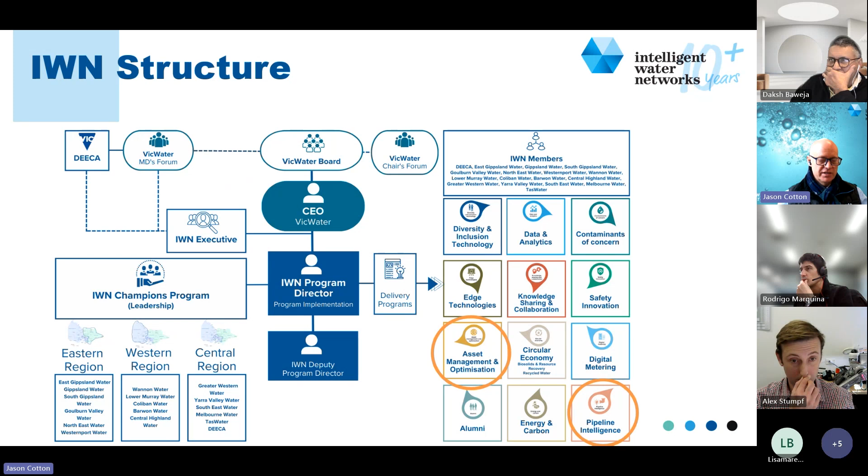Anyway, that's enough about IWN. Let's get into the meat. Why are we here? What is the problem that we're trying to solve?

One thing I'm really interested in is how we can enhance robotics, how we can build artificial intelligence and machine learning into the use of robotics in our sewers, so that we can not only assess the condition of the sewer, but predict the condition it's going to be in, and hopefully overcome any challenges presented by that condition.

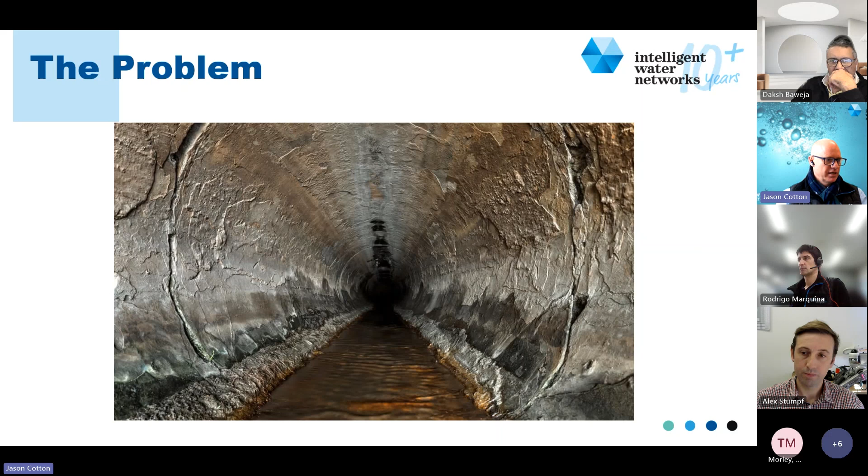So how can we prevent the sewer from corroding? Why does it corrode, why do we get this degradation? Well, you'll probably know the old rotten egg gas made in labs at school or university - that's hydrogen sulfide, and that smell is characteristic of the odor of a sewer. However, that compound is problematic not just from an odor perspective.

When hydrogen sulfide goes into the headspace of the sewer, there are bacteria that live in the pores of the concrete up in the crown of the sewer. Because the water line is only part way up the sewer, you do get oxygen, and so that hydrogen sulfide gets absorbed into the concrete.

These oxidizing bacteria then have a field day with the hydrogen sulfide, and it forms sulfuric acid. And it's that sulfuric acid that eats away at the sewer. So that is a wicked problem.

The other side to this wicked problem is that you put sensors in there and they don't last very long. So trying to measure this degradation, trying to measure the hydrogen sulfide content, is entirely problematic. And so that's why we're here - we're here to solve that problem.

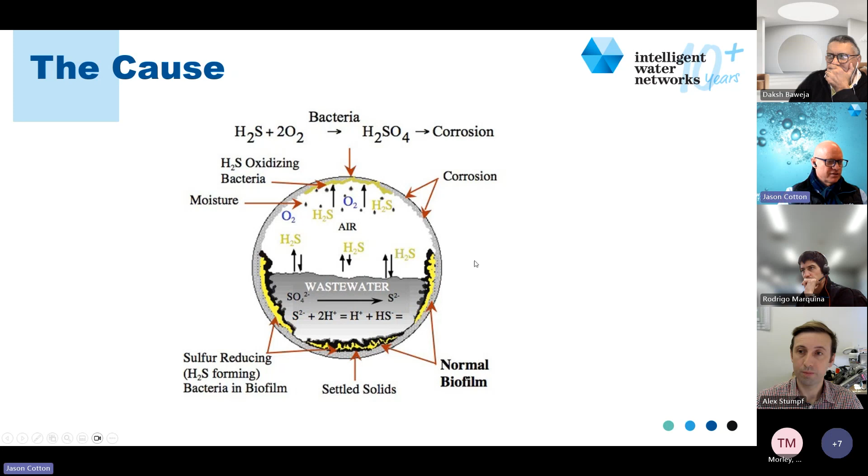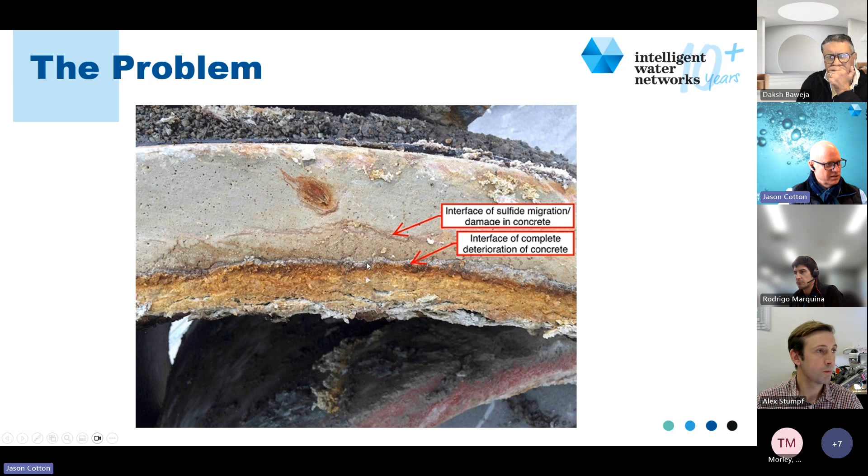You can see here that as you get this porous degradation and that falls away, you then get the second layer where it starts to degrade because sulfide migration is occurring in that concrete. And that is not a good thing, because it leads to sewer collapse.

Now you can imagine the network of sewer that's underground, and if you start getting collapses of sewers under roads, under runways in airports, under houses, that's a massive issue. And so we want to solve for this problem.

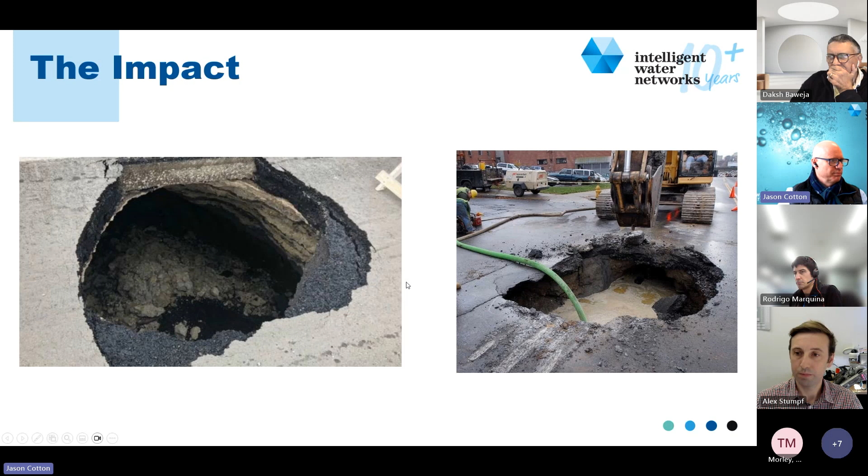The other side to this problem, and this is where we're focusing with Smartcrete, is that along the network, these maintenance holes are a natural area where there's a lot of headspace and air, and the hydrogen sulfide gas goes into that headspace. And so we get significant degradation of these maintenance holes.

And of course, this is where trucks drive over, people walk over, etc. So you get a truck driving over that, as you can see there, and that's going to collapse pretty quickly.

So the trials we're doing with Smartcrete, which Alex will talk into a little bit later, is that we're looking at a whole variety of different robotics for how to do measurements in that particular space that are non-destructive. And we can get a condition assessment and indication of that sewer.

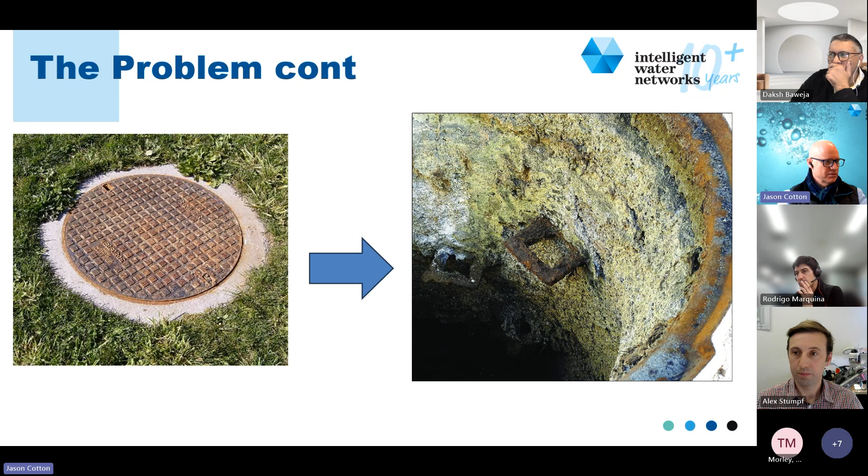And so, as I said, the challenge is in that headspace to develop devices that won't also corrode. And that's a wicked problem.

So lots of concrete sewer pipe in Australia and New Zealand. I'm not sure exactly where I got this figure from, but it's about 300,000 kilometres of concrete sewer pipe. So it's a significant asset that Australia has.

It's been listed as one of the federal government priority areas too, in terms of infrastructure and trying to maintain and prolong the life of this significant amount of infrastructure that's around Australia.

As Jason spoke about before, there's a common failure mode, which is the H2S attack. It can be quite prevalent in certain parts of the sewer network, and it varies along different areas. Some areas might have lots of H2S issues, and some areas are untouched, and they can remain in the ground for many tens of years, maybe hundreds of years in some of the really old sewer pipes that we have, in particular in Melbourne.

So a bit of background to both projects: how do we go about improving the remedial works, how do we prolong the life of these assets?

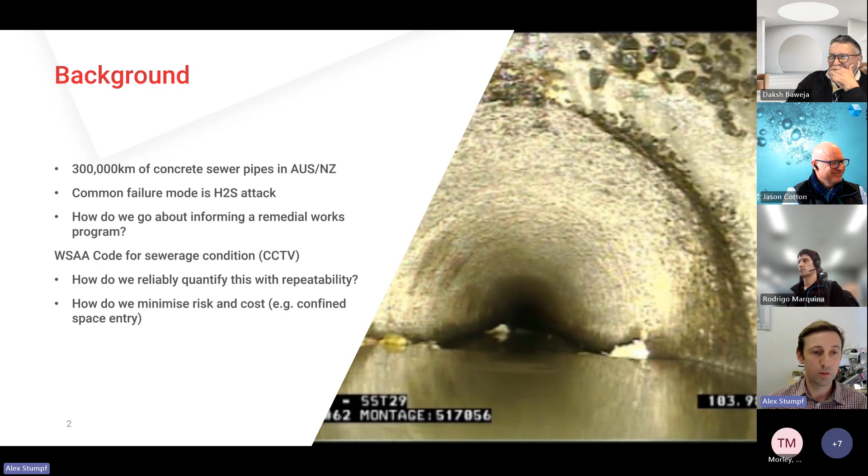We want to use robots and sensors to do this work for us. So it gives you a bit of background. Just to give a little bit of an overview, this might be somewhat obvious for some in the session today, but it's good to clarify what we're talking about here.

So the sewer access points are obviously the hole that goes down from the surface level down to the sewer pipes, and they have a shape to them that makes it challenging for a robot to do a condition assessment in. So there are certain physical constraints as to how we may position a robot in this pipe to do our sensing.

And then you've got your sewer pipes, which are the pipes that go in between the sewer access points. So to get there, we have to traverse the sewer access point. We pop the robot down, and then it will go along the sewer pipe and do its condition assessment. In this case, I've got an image of a CCTV robot. They call this robot the Beast. I don't know why, maybe it's a bigger robot, but it's got this nickname, which is good because it actually pushed our prototype robot down the pipe when we were doing some field trials about a year or two ago.

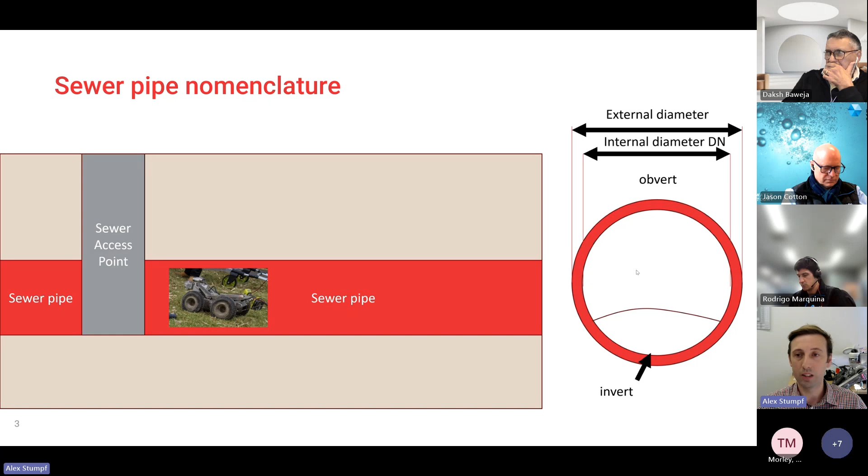Now in terms of degradation for a sewer pipe, it varies. Some people think there's more degradation at the obvert, some people think there's more degradation at the effluent line. But from what we've found, and we haven't done a lot of testing, we're under the impression that it varies, which makes sense, because it's very dependent on the local environmental conditions as to how much degradation you're going to find on a particular section of pipe.

So I'll move on to give a little bit more of an overview of concrete pipes, and I'm sorry if this is common knowledge, but it might not be for some. I've lifted this out of the Holcim concrete pipe reference. Obviously these pipes are made to a particular modern standard, Australian standard in terms of concrete compressive strength, all that sort of thing. When we're talking about pipes, they're classified into different classes and different DN sizes.

So for our projects, we have focused on smaller diameter pipes, but for the ones with Smartcrete, we're looking at diameters typically 600 and above. So for a sewer access point, the opening size is usually 600 mil, and then it will fan out to a much larger diameter.

So that's kind of the sizes of pipes that we're interested in. Different classes have different internal diameters that they may start off with. So one of the things that we will do with this project is determine which class of pipe is in the ground using our sensing means.

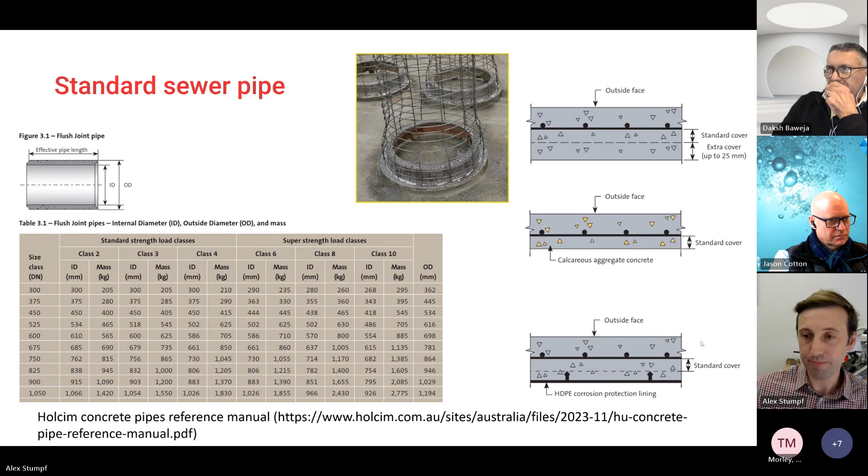How am I going for time? I probably should kick on here because I reckon I'm going to run over. Keep going, Alex, keep going. Okay, just you keep me in check so I don't run over time. So sewer access point, this is kind of five minutes. Excellent, all right, I can do that.

So this is what a sewer access point typically looks like. You'll have the access hole, which is normally 600 mil diameter, and that section of pipe will only be a short section typically. The reason is that if someone's going to enter into the hole, they don't want to be confined within a 600 mil opening. So they try to make this as small as possible, and then the pipe will extend outwards to typically a metre, around a metre, maybe 1200 on some of the larger sections. So it does vary.

Again, for those older pipes, it depends how they did it. If they cast it in situ, they've got the concrete truck and formwork and they made the pipe. For modern installations, it's pre-made, prefabbed, and they drop it in the hole, and you've got the pipe there ready to go.

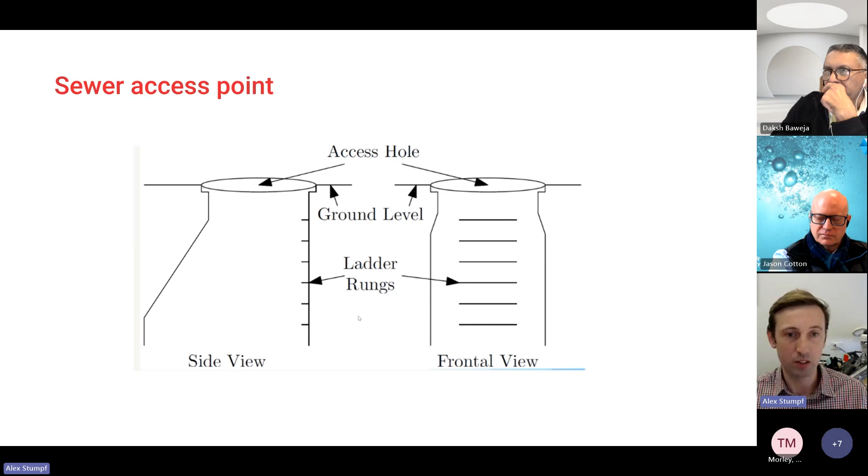So the reason I'm talking about this in particular is that it gives you an overview as to what the geometry is and what we're dealing with in terms of a sewer access point in particular. It's not a standard straight pipe, it's got some bits and pieces that we've got to deal with.

So at the moment, how do we measure the degradation? I'll go through this quickly. We use a penetration test effectively. What we mean by a penetration test is that we have a little probe that comes out and touches the wall and pushes through until it gets to a certain threshold. In the past we've set that to about 50 newtons, so it's not a very high threshold. With that we can see what is the depth of penetration, where does the start of the sound concrete begin, and we're not greatly impacting that degraded layer.

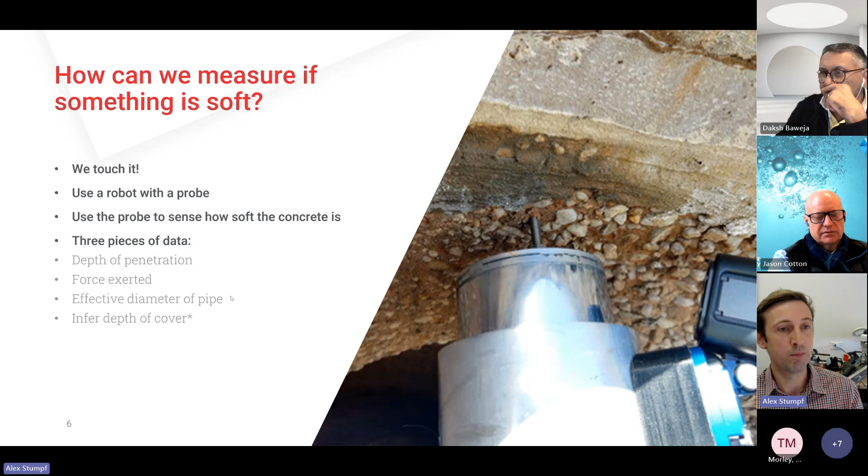Okay, why is my thing not going forward?

Oh, I want the other picture. Oh, I can show this. Yeah, so this is what a penetration test looks like.

For non-degraded concrete, we've got the penetration distance on the x-axis and the load on the y-axis, going up to a 50 Newton threshold. So for non-degraded, you expect the force to ramp up very quickly. For degraded concrete, we have a much longer profile that we find.

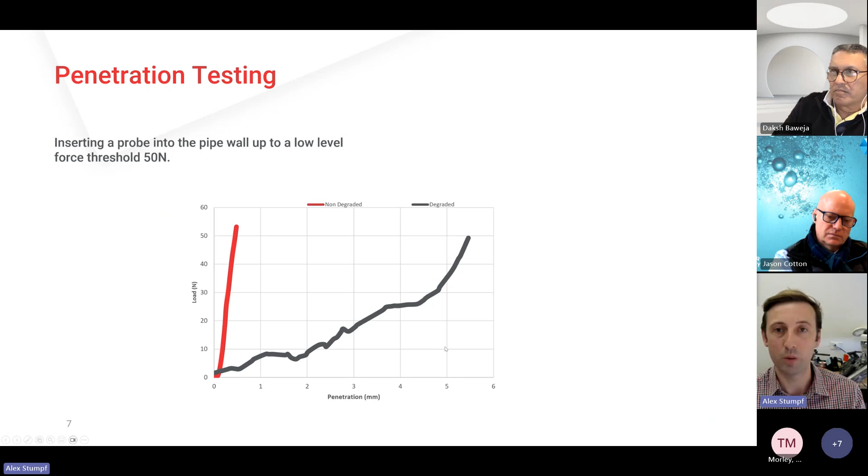So this was a project with IWN many years ago to look at the sewer access point. This was a proof of concept, just to have a look at this penetration test.

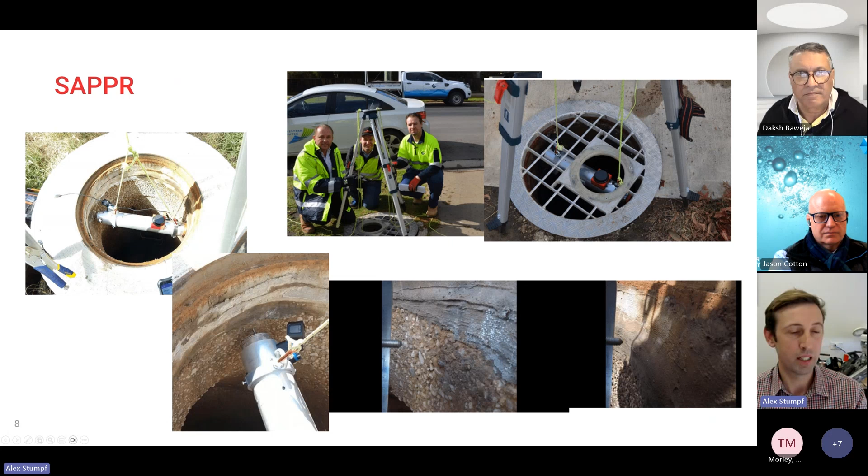It's a robot that does the sewer pipe. So we put this down the manhole, the sewer access point, and it goes along the sewer and does a similar thing, does a penetration test.

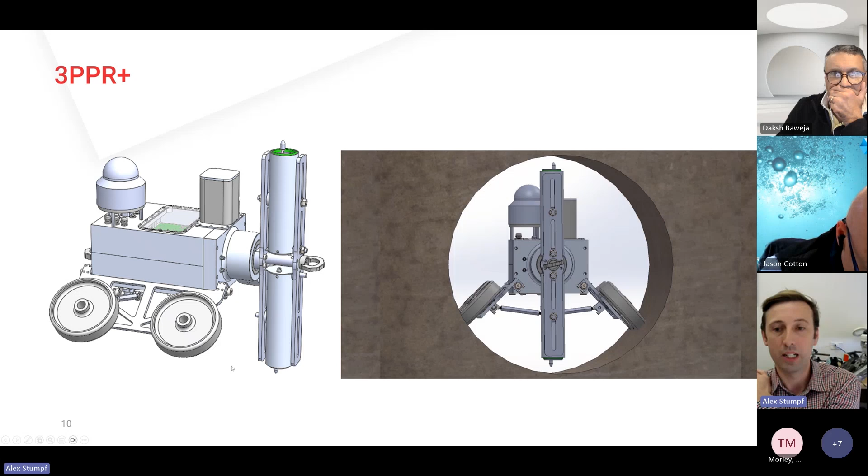Yeah, you can see it here getting lowered into the hole. You can see our issues with the ladder rung, and that we need to think about how we get that robot in there.

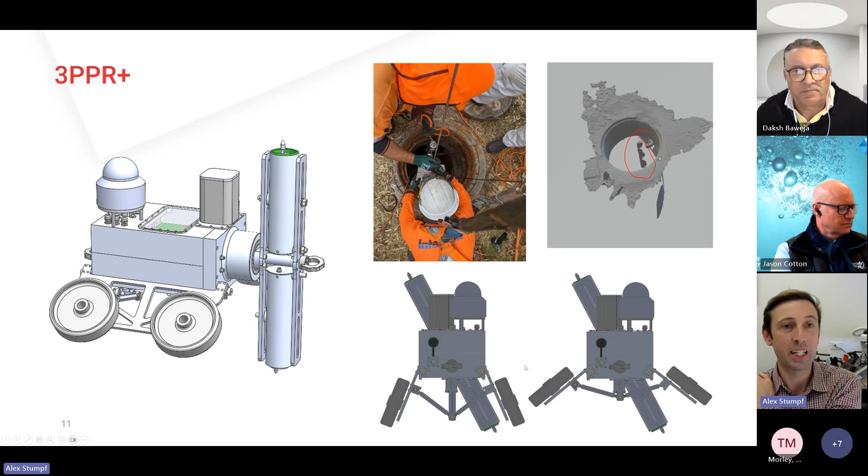I'll quickly go through this. This is it in the hole doing some penetration tests. I won't show the video because I'm assuming...

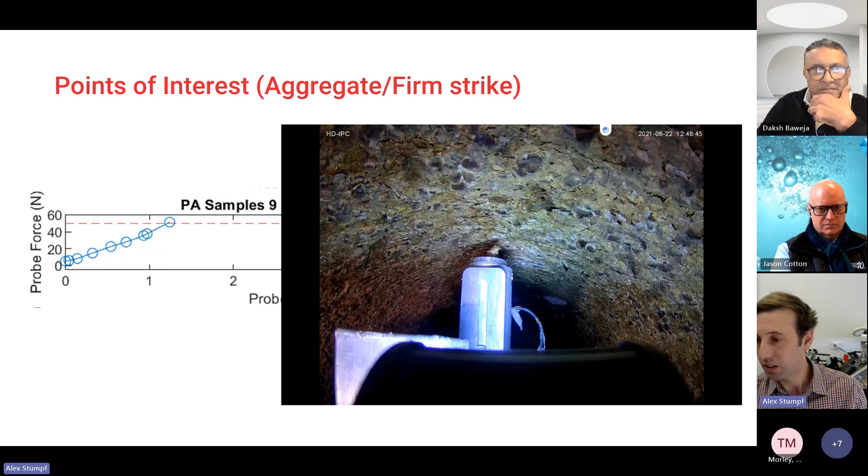Yeah, I'll just keep going through. There we go, that one's got a bit of stuff on the end.

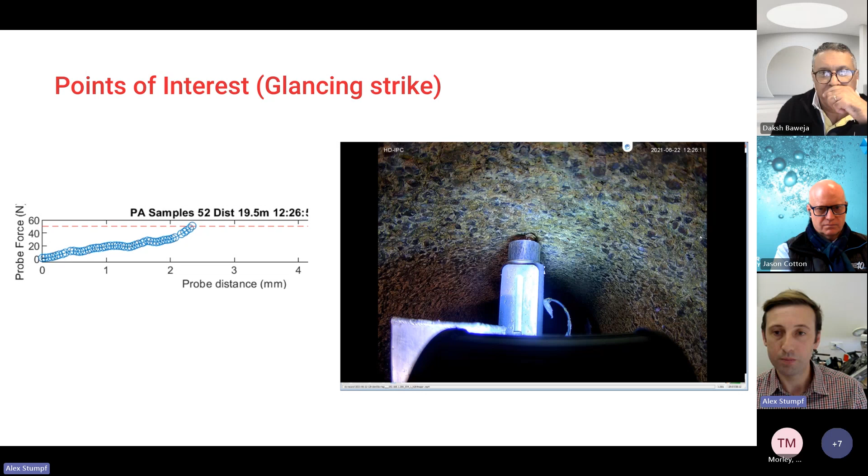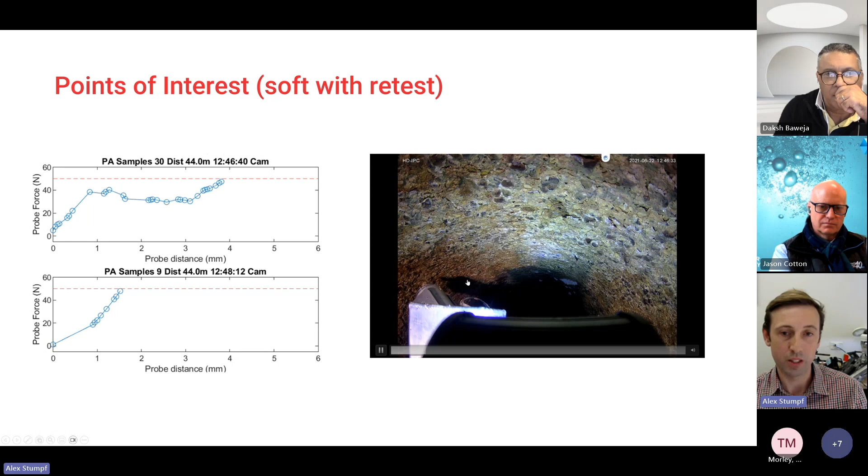And yeah, this is a good one. You can kind of see, I hope if that video is coming through, that we can test at all different angles within the pipe.

And so this resulted in some data that showed that the penetration distance does vary along the length of the pipe and at different angles.

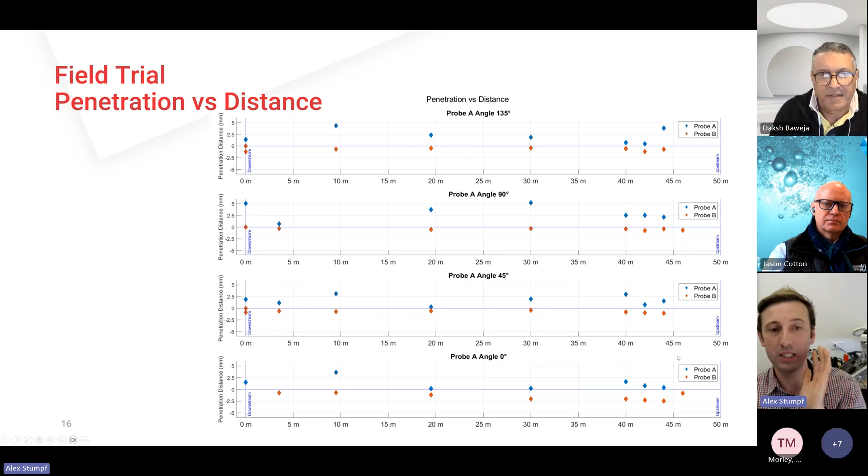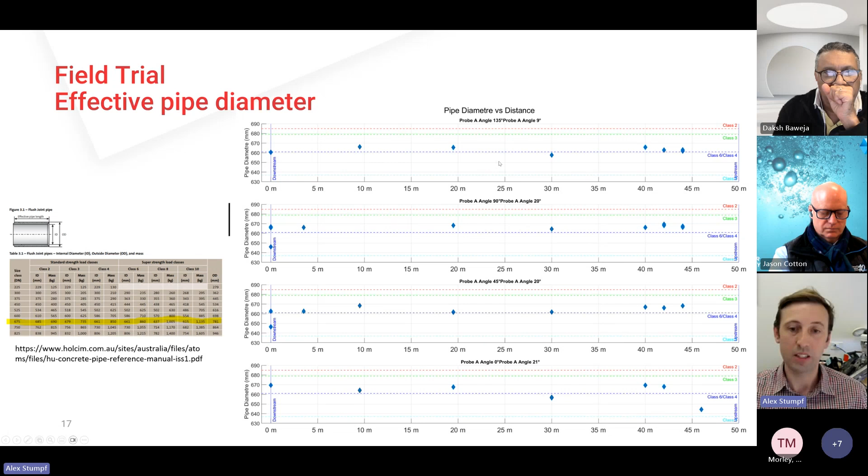And again here we're looking at classifying the pipe in terms of which class. So obviously, as the effective internal diameter changes, we have different types of classes along the length of the pipe. So where do we want to go from here?

This is where the SmartCrete projects are picking up from - we want to build on the penetration test but look at multi-sensor application. So we want to look at different types of sensors and different things to classify, to improve our understanding much further than what we were doing with just the simple penetration test.

And it all comes back to those parameters that I showed with the sewer pipe - external diameter, internal diameter, rebar cover, compressive strength, all of those sort of things. Those are some of the key parameters, but there are other parameters too, like pH level, moisture, those sort of things.

So yeah, we're looking at a multimodal sensor package that we can position with our robots in the pipe to get a much better understanding and to improve on the current classification methods.

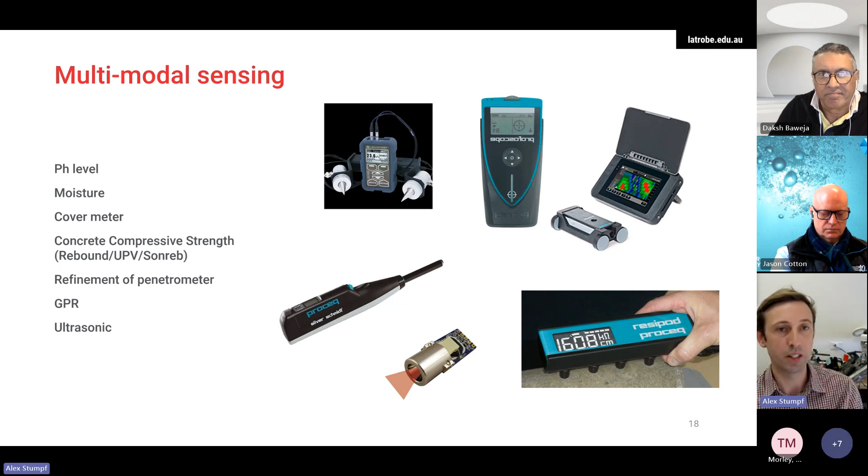And I think that's it. I've run over time and I do apologize - I got excited, I think we all did.

I should have done this before, but sorry guys. The other person that's on the line that we should acknowledge is Professor Vute Sirivivatnanon, who's a research director of Smartcrete, and he and I have spent many hours looking at concrete pipes and durability and all the stuff you're talking about.